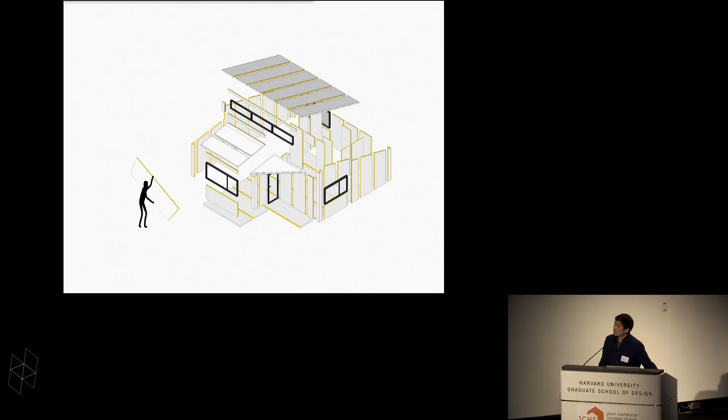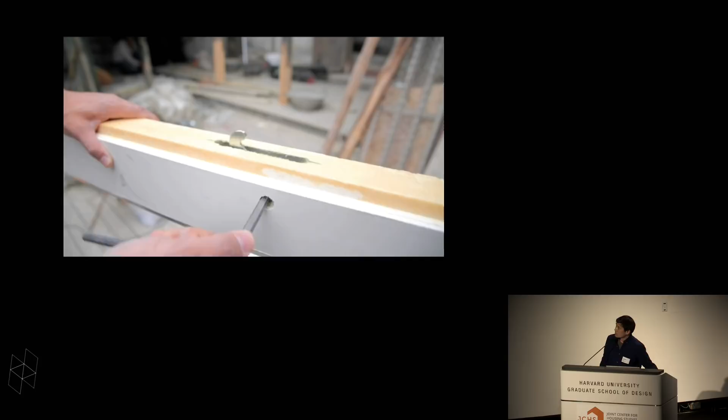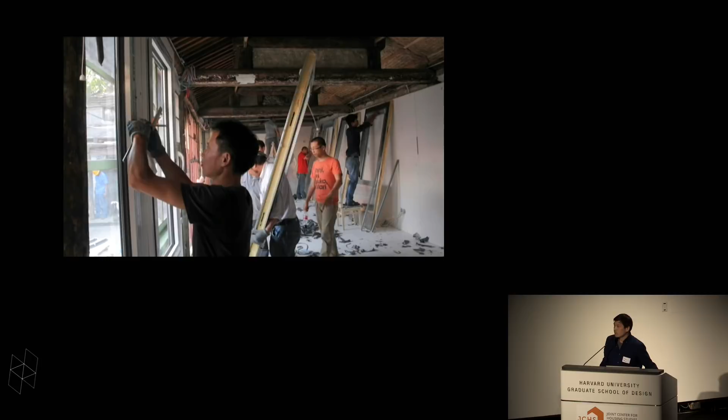It's an injection molded process. And the result is a panel that is structural, highly energy efficient. It's light. It can be shipped flat. One of the things that's really interesting about this is that we've also molded in these locks that allow you to lock these panels together very quickly. So that means you don't require skilled labor, and these houses can go up in a very short amount of time.

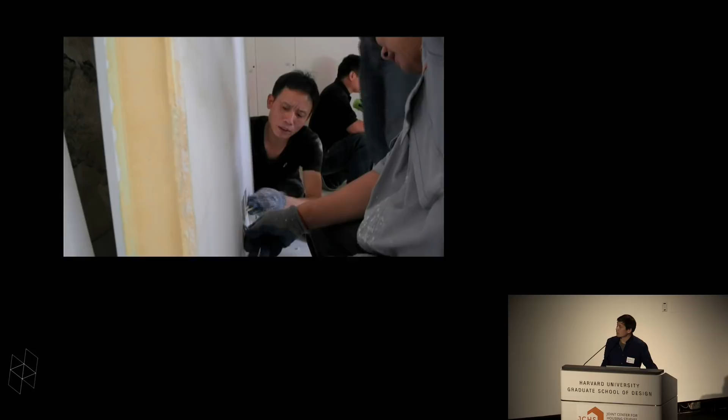This is me and my partner Zang Feng putting one of these together, and you see the panels are quite light. You can integrate all kinds of things such as electrical. And the speed of the process is quite important if you're talking about the kind of housing you're developing, but I'll talk about that a little bit later.

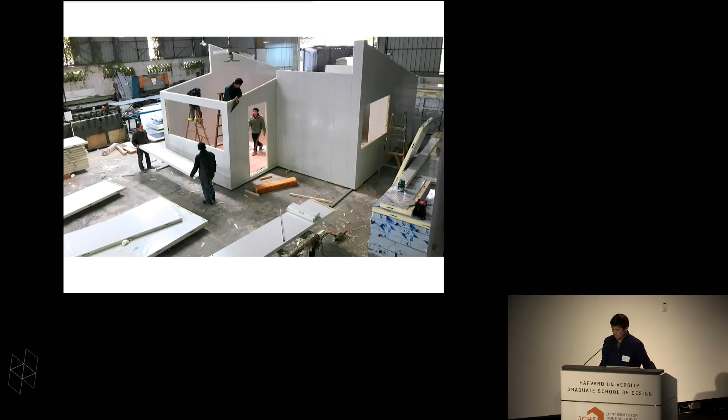This is the factory, and as you can see, we do have panels that are fairly standard, and we have ones that are different. So the way we do that is we have a mold that is adjustable. So these molds can be changed according to the needs of the people that we're building for. And so we can do this in a way that is still economical. It doesn't increase costs very much, and still be able to provide for designs that fit unique situations. And we've found that every situation has been unique.

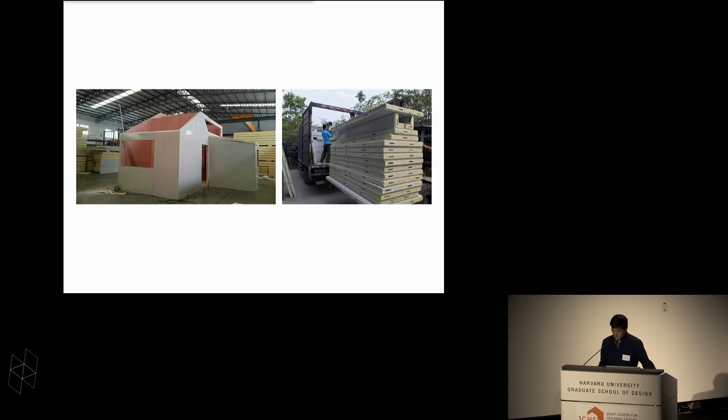I'd like to move into also the economy of location. Where we build things matters a lot in terms of cost. I know that's obvious, but how do you go about that? How do we deal with that? So our work started in these historic areas in Beijing, in one neighborhood in particular called Dashilar. And this is a very interesting situation because this is one of the most expensive cities to live in the world. It's also one of the most central locations that you can find in Beijing. It's right next to Tiananmen Square and the Forbidden City.

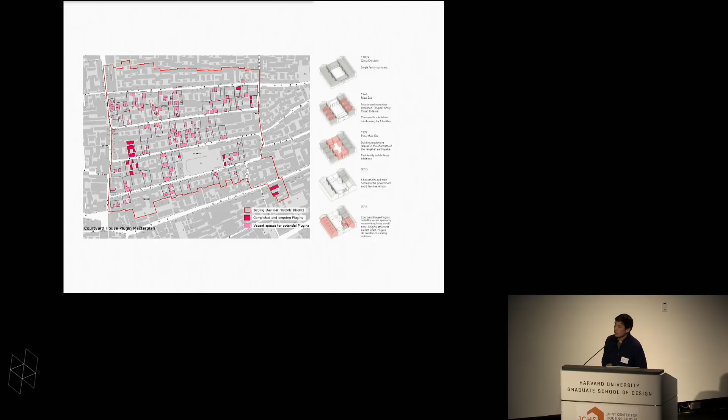And surprisingly, you have a large number of these houses that are vacant. The reason for that is this is a historic area. It has slum-like conditions, and there's been a lot of disinvestment, flight, and so forth. These are all centuries-old buildings that are degrading. And we wanted to come up with an alternative to the typical kind of urban renewal that you would find. So we came up with an approach to say that you don't need to relocate people, you don't need to tear anything down, and that you could build a house inside a house.

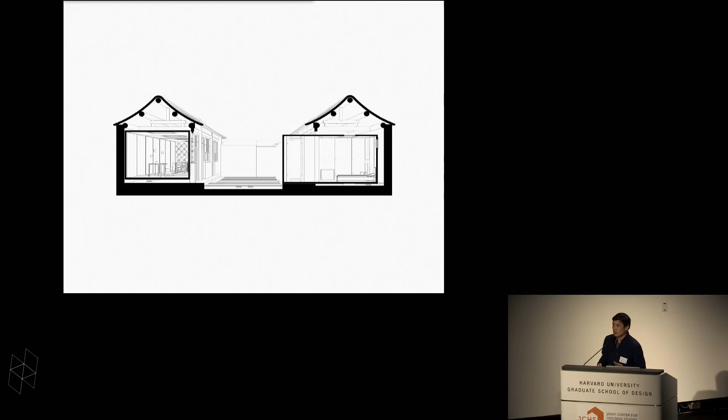And so this is an illustration of how we do that. So we keep all the original structures as they are, and you can think of it as a method of retrofitting, upgrading, or infill. And you can see here, this is some of the results. And these are before and after images.

So through this process, we began thinking about cities that just continually expand outwards, following cheap land, and understanding that cities just can't continue to do that, and we have to find other ways of building, perhaps building inwards. Here you can see an example of this. This is actually not in a historic area. This is in an urban village. This is actually rural land that's been surrounded by the expansion of the city.

But similar conditions, where properties have been abandoned and very complex issues with property and land rights prevent a lot of development and adaptive reuse, and we try to skirt around some of these issues through this approach. And so this idea of developing in places where people already live means that you also take advantage of existing communities, community networks, infrastructure, social services, and you can imagine how difficult it is, the costs that you would have to come up with to bring all of that to these locations that are further out of the city.

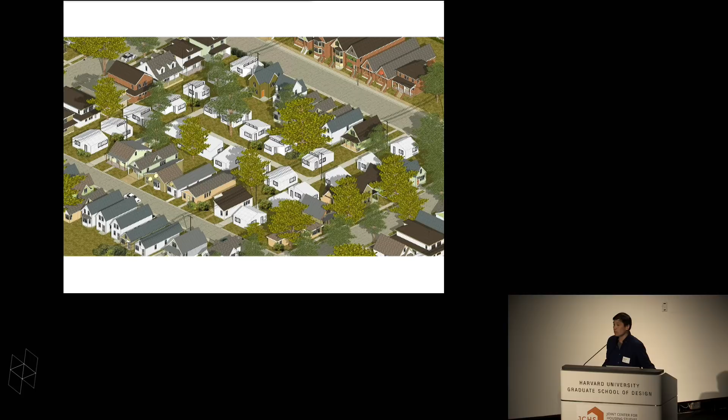Cities without land, without funding, would be able to rely on private homeowners. These would only be rental units, but they would provide secondary income. The hope is that you would have more inclusive neighborhoods, lower-income people that could move in. And it would be sort of a counter to this NIMBYism that we find a lot. Fortunately, it's been very successful in many cities across the U.S., so this could be a very exciting area.

The last thing I'd like to touch on is the importance of people. There's so much value captured in the communities that we try to engage in, and so often we don't extract that knowledge. So part of the way we do that is, we actually didn't start off with the product. We moved into this neighborhood without having any idea how to deal with the issues; we didn't understand the issues. So we moved into this neighborhood, and it was a way for us to engage with locals.

But we also used our system for designing our office. So this was also a courtyard house. This is not all ours. We share this with other locals. And through this process, we've also engaged with lots of people around us. They become our clients directly. Some before and after images.

And you can see that the relocation process, or the upgrading process, is not such a big deal, because they can basically move the furniture out for a little bit. We do this for a day or two, and then they move stuff back in. These are very small. They're about 250 square feet, 300 square feet. But through this process, we've really learned a lot, and the design has continued to change and adjust as we've gone along this process.

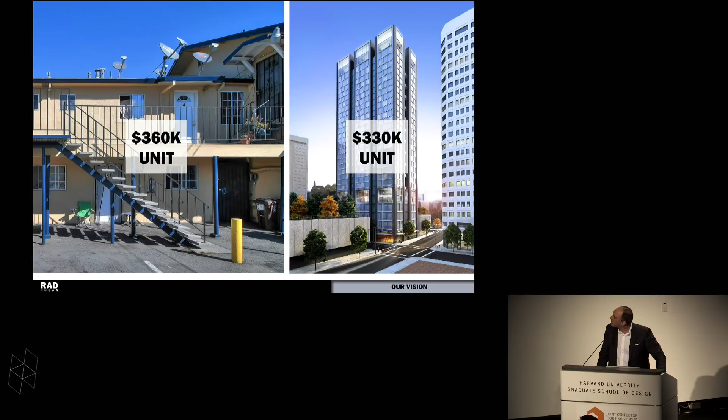If we can do that, if we can build a 40-story tower at half the cost of conventional construction, then we can place our costs at less than the cost of suburban multifamily construction, and we can reverse the pressure on cities to sprawl out for miles and miles and miles and create pressure to build up our urban cores. So how do we do this? So our thesis is that we need to rely on a manufacturing basis of construction and on housing delivery.

So this is our factory in the California Central Valley, and our workers are not local to the Bay Area, but the fact is, if our workers weren't working here, they would be driving 2 hours each way to work in Berkeley and San Francisco and Oakland, because they are trade workers, but they can't afford to live in the construction markets that they serve. They can afford to live near our factory.

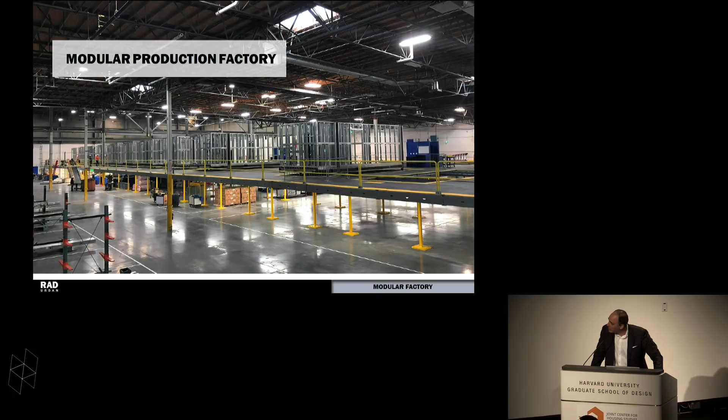And so you can see it's an assembly line. And what we're trying to create here that has evaded the construction industry is that Model T moving assembly line moment when automobile manufacturing achieved almost a 90% productivity improvement very, very quickly. And to the question of, well, what is left for the local workers and the local subcontractors, I'll remind people that the introduction of the moving assembly line was not the end of the automotive workforce, it was the beginning, and created an explosion in manufacturing employment that lasted for many, many decades and supported millions of families for a long time.

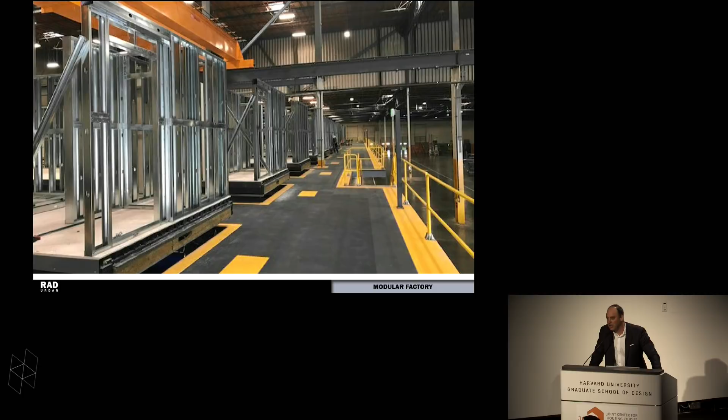You'll also notice that in our factory, the modules are steel. They have a structural steel chassis, but we are using light frame metal stud framing. That's a function of current building codes and historic practices, but that is not the way forward. One of the things that a manufacturing basis for construction allows is we can move away from legacy materials that were based on what a construction worker could carry up a ladder or a stair or a scaffold, and we can move to larger, more efficient panelized assemblies like what James is producing, but even larger, things that you can only achieve in a factory.

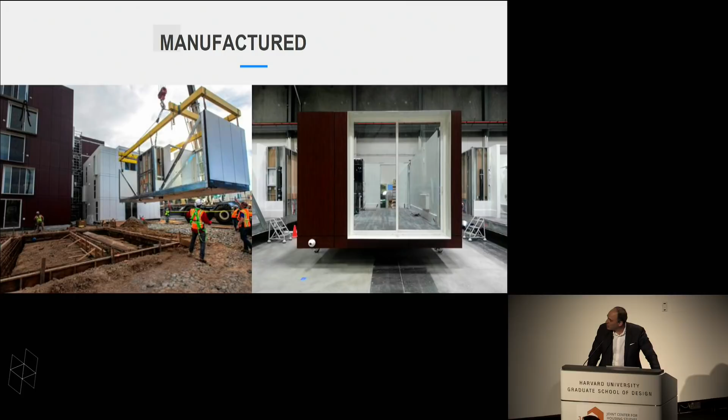So these are some examples of our pre-finished volumetric modules going into a project in Berkeley. And I've got a few more pictures of projects later. We've now completed 3 projects. We have 2 projects underway, and our first tower's approved, and we're hoping to break ground before the end of the year. Now, we need to marry the manufacturing process to an end-to-end project delivery scheme, and that includes design and engineering.

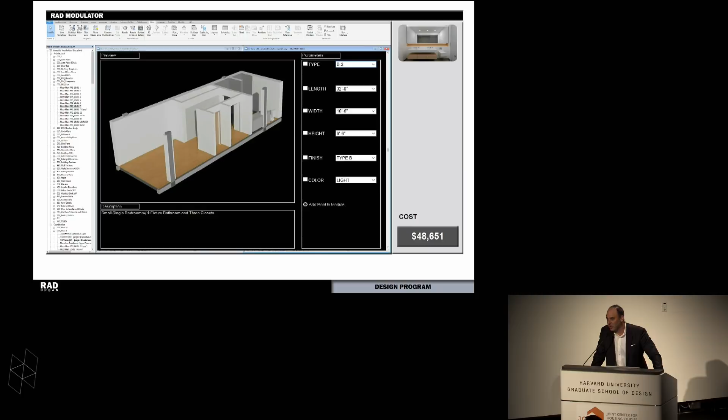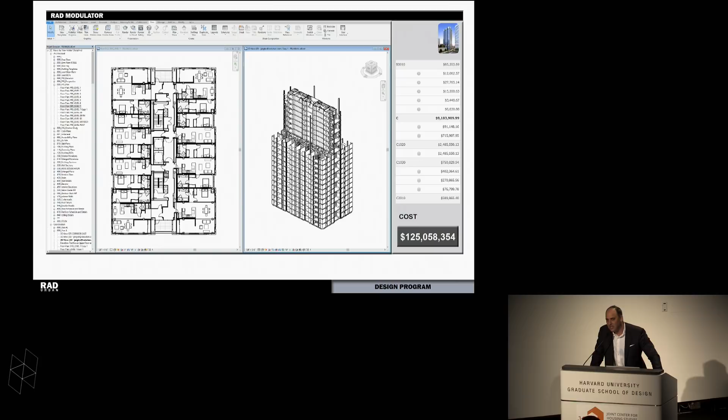And so one of the advantages of modular construction is, as a manufacturer, we have a bill of materials, and that bill of materials is connected to a supply chain and suppliers and prices attached to each line item in that bill of materials. And when we take a module and change it, we know how the cost changes instantly. And so as an architect or a designer or a developer, we can now actually design right to a budget. And so as we pull modules from a catalog into a massing model, we can instantly see what we're doing to the cost of the building.

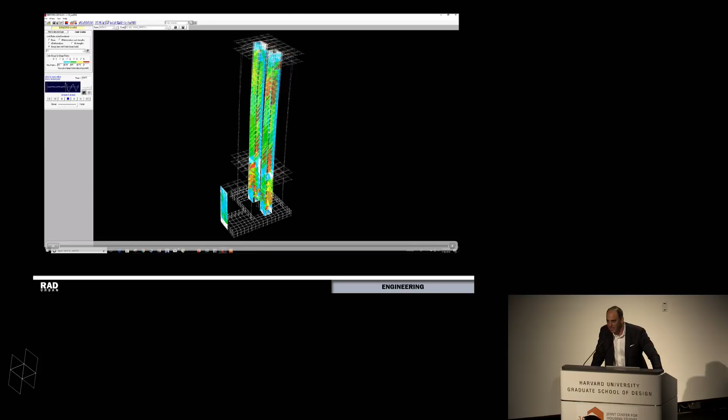Similarly, we can standardize the structural assemblies. We don't need 100 or 1,000 different building cores. We can have some standardized core assemblies. And then we can apply site-specific forces to them. That's the Loma Prieta earthquake.

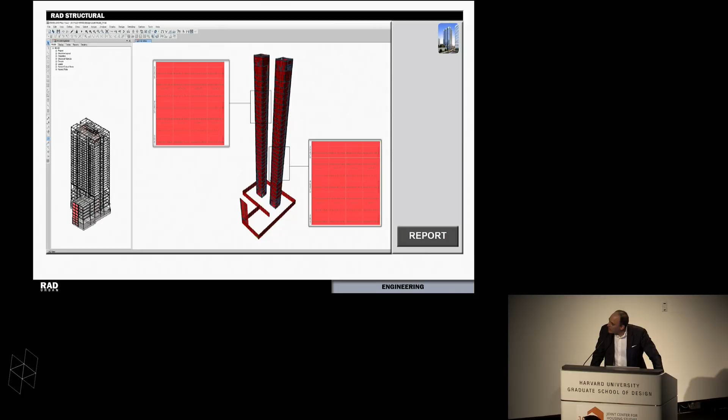And then we can apply the member sizing to the standardized configuration and go into manufacturing. Now, we also have to think about what we do at the job site. And we need to extend the manufacturing ideology to how we build on site, moving away from the notion that, oh, construction is risky, so as a general contractor, I'm going to be a broker and subcontract away all my risk.

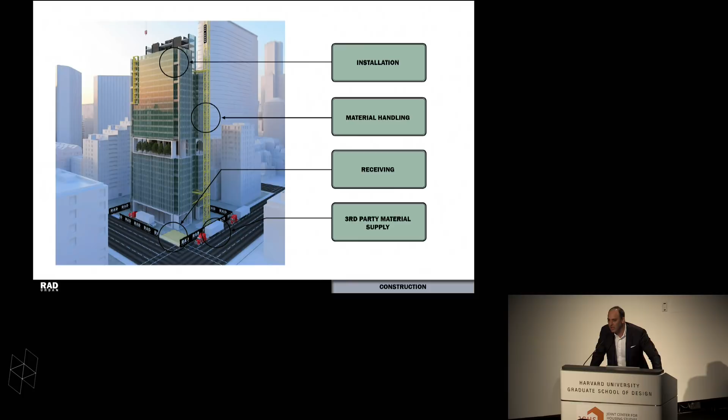And I think Fritz will probably speak to this even more, but our perspective is to manage the job site as an extension of the manufacturing process, where we manage a supply chain outside the gates of the job site, and then on the job site, we have receiving, material handling, and installation. And those are all different activities performed by different crews. In a factory, you would never take a production worker away from his station to go unload a truck. But on a high-rise, that's exactly what happens, only the crew's coming down in a material lift from 30 stories up.

So where are we today? So that's our pilot project, the 6137 MacArthur, a little 5-unit project to make sure that we could engineer modules, we could manufacture them, we could stack them, that we could rent the building, that we could sell the building, and that we could make money. We lost $1 million. But we saw that it would work at scale.

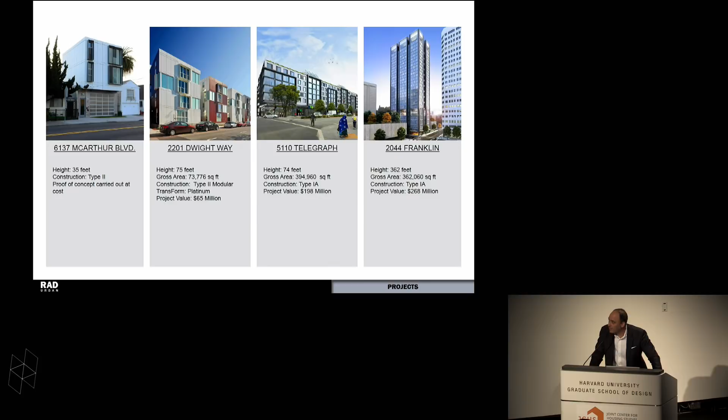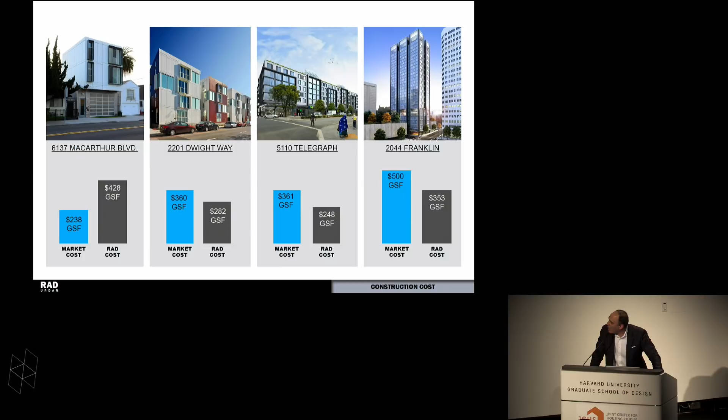The next project was a student housing project at UC Berkeley, and this was a success. We achieved a substantial savings. We've now completed 2 projects, and like I said, 2 projects are underway, including 5110 Telegraph, and Franklin is our first tower. So you can see our cost on the first one was almost double market cost. But now we're achieving 20 to even 30% savings over conventional construction.

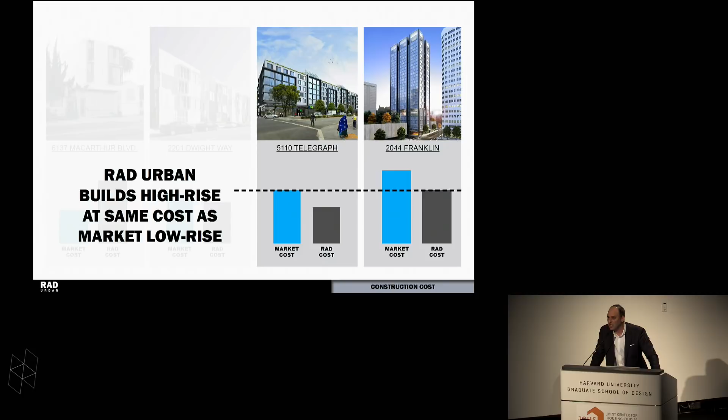And notably, we've gotten to the point where our budget for our first tower is consistent with the market cost for a low-rise building in the same market. Now remember, our goal is to build that tower at a cost that's less than the cost of a low-rise building in the suburbs. And we're not there yet, but that's where we're heading.

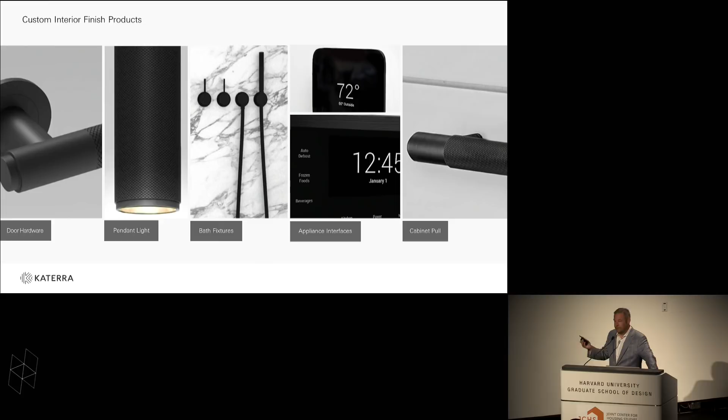One other thing, when we say we make a lot of the components, we not only make components, but from an ergonomic standpoint, we think about putting everything, from the appliances that we either make or design and have from a supply chain standpoint, down to the radios on the wall, having the same consistent patterns and themes like you would see the stitching of a car put together, rather than one brand of appliance and another component in the home. Design variations, this is just the ability to deliver different designs with the same basic architecture.

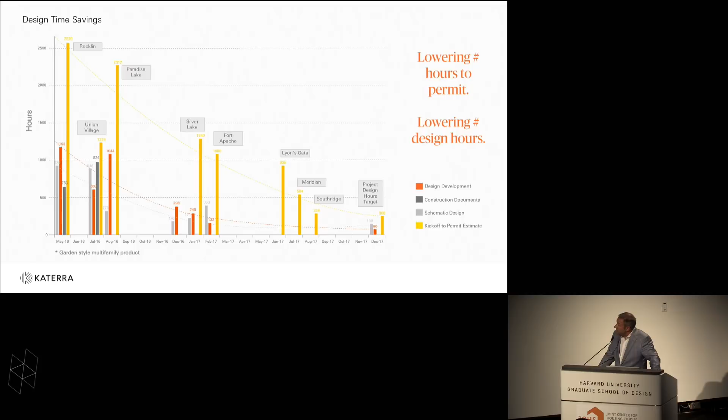Sustainability is a huge issue for us. Somebody mentioned in the last panel CLT, which I'll go to in a moment. I'm actually going to skip through, in the interest of I've only got 1 minute left, a video we don't need to see. But for us, it's the same concept of drive half the time, half the cost, half of the variable OpEx out of buildings by owning absolutely everything from the supply chain to the finished delivery site, and also do so in a very sustainable way that we think will drive the long-term optimization of buildings to a better place than how we've seen the footprint over the last 100 years.

To that end, I know I've got 1 minute left. We're underway on the largest US CLT factory, cross-laminated timber factory, in the Americas. That'll be up and operating in November. 5% of the global CO2 emissions come from concrete. We would like to minimize it where possible. We think this is a better, faster, cheaper, and prettier solution.

And we're hoping it's applicable to all the rest of the development community that's in the room and elsewhere. And this is one way where we hope we can collaborate on high-rise to build much better, faster, cheaper, that will help aid and abet the modular designs of the world. So that's it.